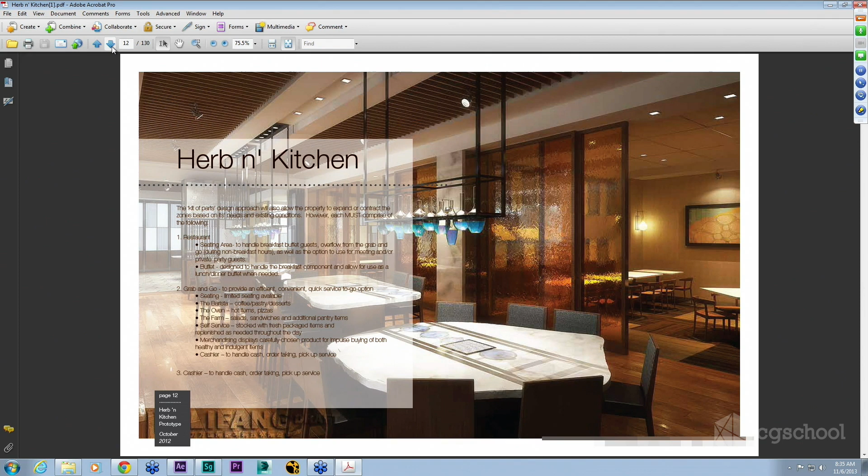And to answer your question, it's all of the above. It depends on how the client comes. The client can come to you not knowing what they need, and then you do the whole thing for them. Or like these two clients, we already have all this stuff we worked on for 2 years, and we work with their marketing department on that. So it really depends on the client and the type of project.

You bring people to a marketing center, and that film is what you show them to really wow them. Maybe you shouldn't just blast it out and let everybody see it, because then they miss part of that story. Everything we do is meant to be experienced, and in some cases presented by people trying to sell something. Our stuff doesn't sell.

As much as we like to think it, our stuff alone doesn't sell anything. It needs to be part of a presentation, a package. So I think we sometimes try to get people to not misuse a lot of these.

So we're like, okay, let's do a little teaser of this film. Maybe we'll do it for free so you can blast that out, or play it somewhere, and then people are going to be like, oh, what's that about? They're going to pick up a phone, or be driven to a marketing center, and get to experience the full thing. But you have them there.

Most of these transactions that we deal with are personal transactions. There needs to be somebody trying to get you to sign a huge, $10 million lease for the next 10 years. So I think it's a great question, and something everybody here should be thinking of.

It's like, my renderings, how are you going to use these renderings? Are they going to go on a brochure? A lot of our clients don't even know. They're like, I don't know. How should we use your renderings?

Yeah, to avoid that, back to your question, and it's perfect that you asked, because that's actually the next topic: establish the end use of every single thing you do. And like Rodrigo said, clients sometimes don't even know how they're going to use things.

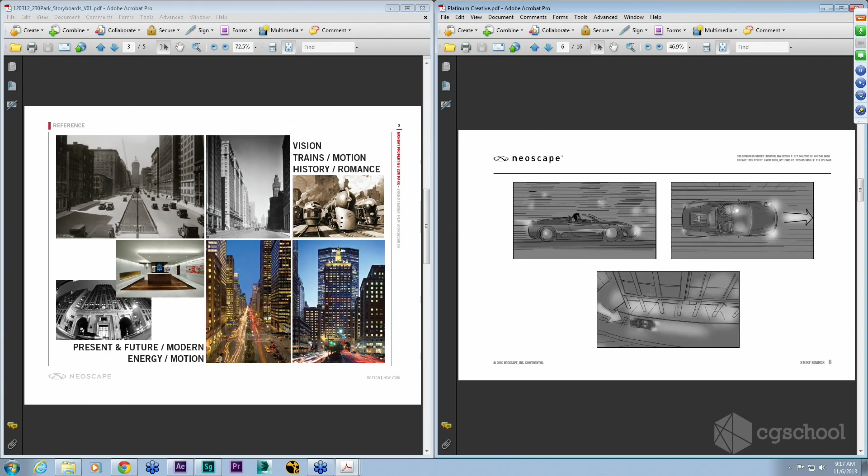This is back in the days when people were spending a lot of money on crazy things to sell real estate, when we had like 6 months to do an animation. This was a film we did, and all you need to know about it is that the client agreed to have a 50-foot tall naked woman painted silver in the film, which I'll get to.

That doesn't happen anymore. So these are slightly more artistic. There's a vibe to these storyboards. This is actually the work of that guy I was mentioning. He's great with characters. This was a character-driven film. He draws action really well, and really gives you a sense. He's a comic book artist, right?

So he really gives you a sense of the sequence, the flow, the camera angle. A lot of what you see here is work that we sat down with him on. We talked about these ideas. We didn't have a lot of preconceived notions about cameras, so he himself figured out a lot of these cameras, and we ended up shooting almost exactly what he crafted for us. That collaboration was pretty exciting.

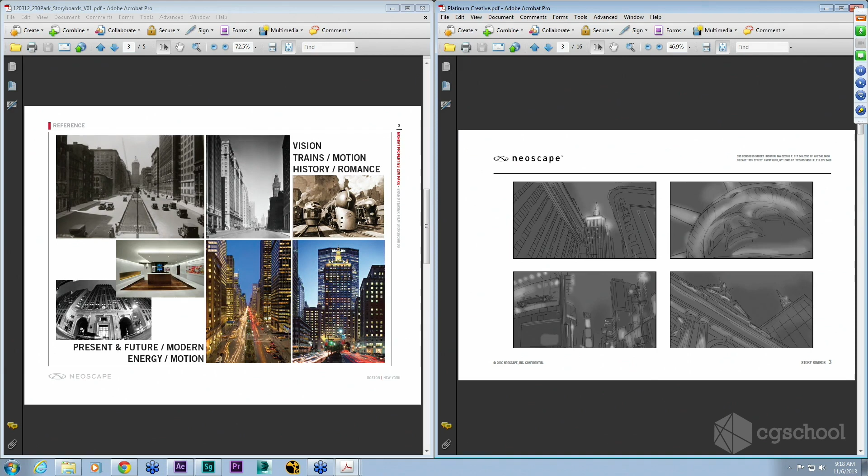So that's again, and we are not going to show this film. The point—you can look at it online.

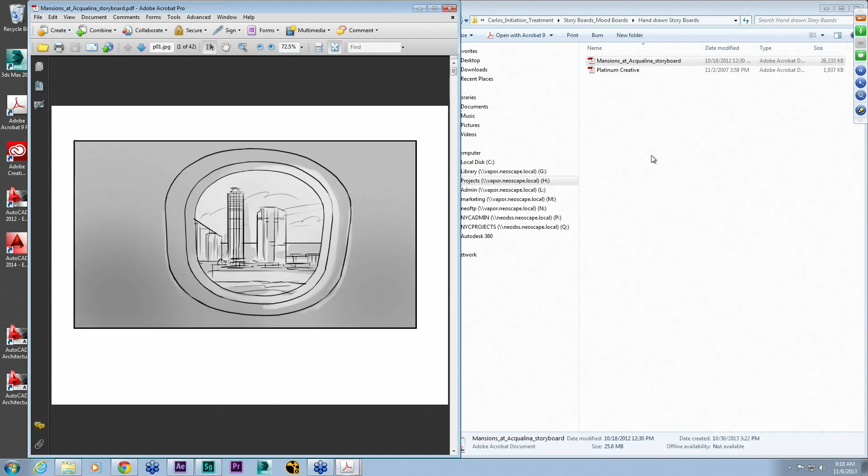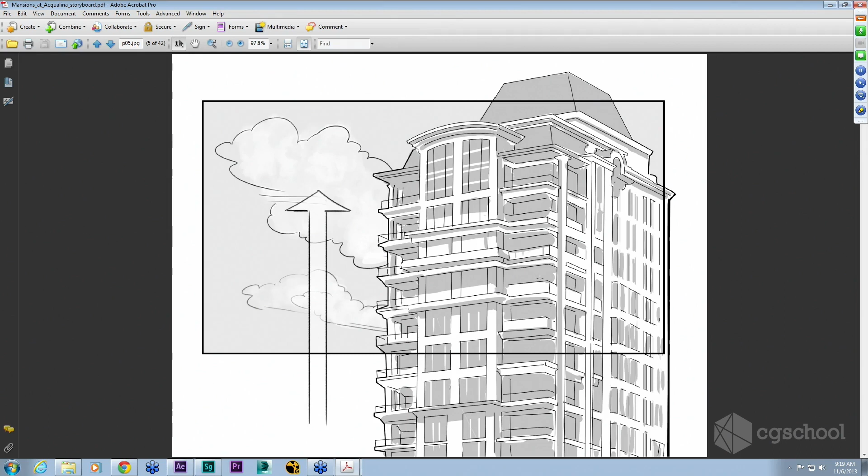The point being, in a document like this one, you need to back up your ideas, your chicken scratch, with a little bit more. In the case of the real storyboards, it's almost not necessary, or not as necessary. You can still have it there, but the story is told in a much clearer way. There's already an intention for each shot, already a little bit of a mood to it that the client can relate to.

So you notice that these two don't have any precedent imagery or mood board page at the beginning, like the City Point one and the other two storyboards.

So a third example I want to show you guys is the CG storyboard. I have two of them, and I'll start with the easy one. It's a museum in Guatemala for the Mayan history. We already had a very good 3D model at this point of the building, and we were already doing renderings for it. The client, these architects, along with their partners - there were a couple of other architecture firms involved - were super cool young guys willing to do whatever we wanted with both the renderings and the film.

Unfortunately, the film has not moved forward, but it's a good example of what you can do once you have your assets already in there. I'm not as good at drawing like Rodrigo is, so this is the way I do them.

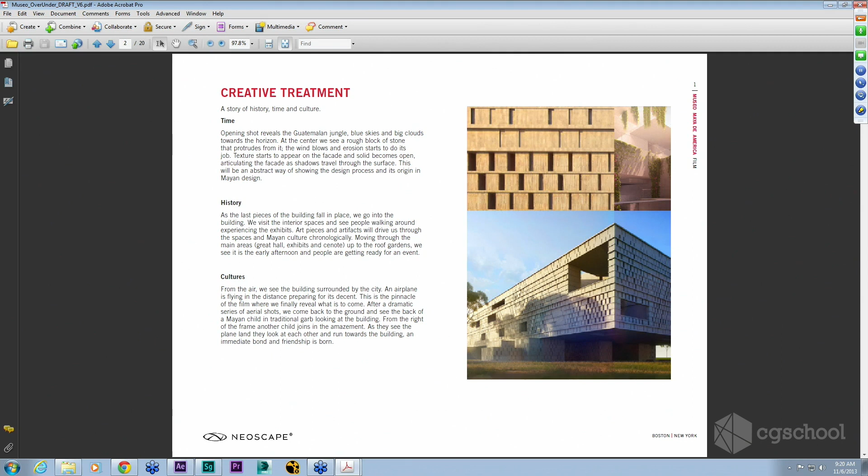Wow, that's a low blow. No, dude, come on, they're good drawings.

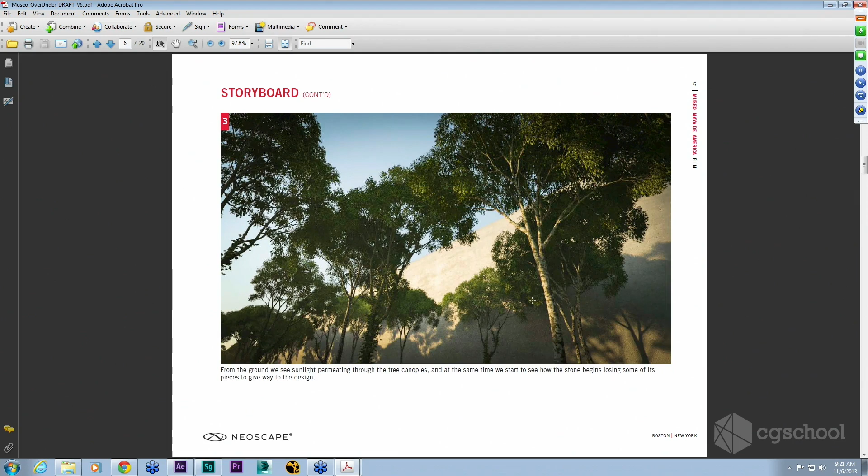So you do your research, your mood board inspiration, and very straightforward - you start grabbing your basic model, V-Ray, sun and sky, some forest pack in there, and then start putting some cameras together to explain the whole thing. A little brief explanation at the bottom, and that's pretty much it.

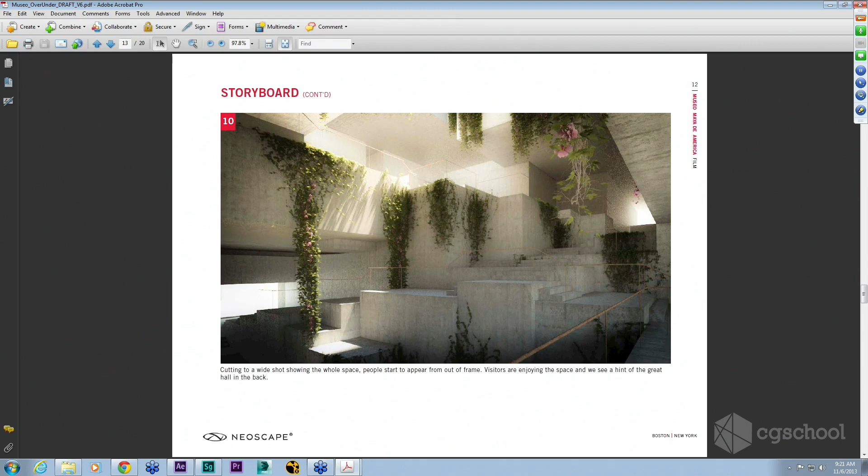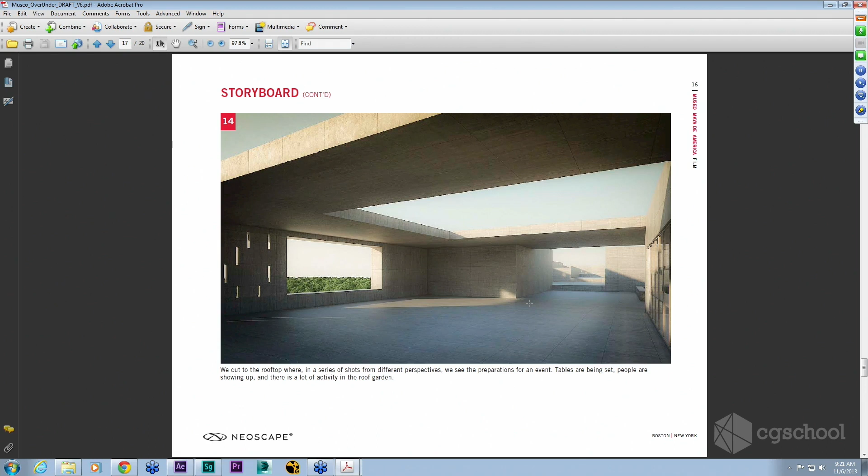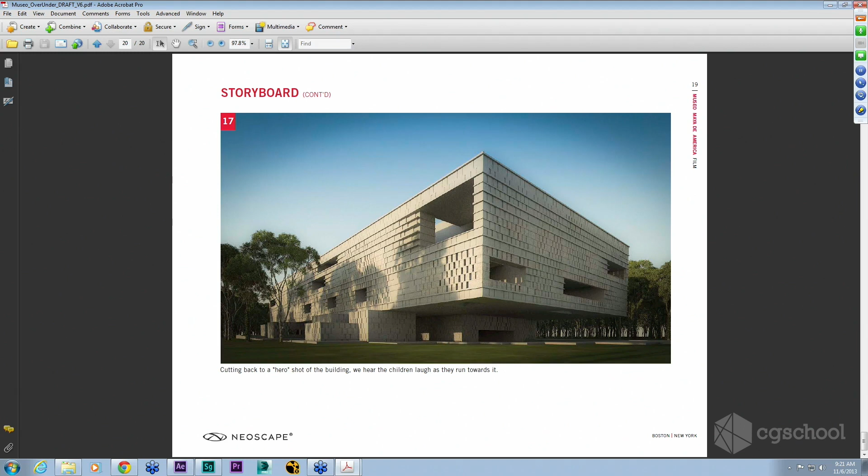I always use the children's chapter book analogy. It's a perfect way to present, particularly if you're going to hand it off to somebody, to walk them through. Some people love the visuals, and ultimately the visuals are the thing you're really selling. But a little bit of explanation - it could be goals, it could be an explanation of the movement or activity you hope to capture. It's trying to leave as little information unanswered for the client, but still not give away that sense of mystery, which in this case was about this beautiful building being carved out of the landscape.

So each time we turn these on, we're going through and just checking for balances, which is why we turn them on one at a time, make sure it looks correct, and then move on. Or else it can be hard to tweak multiple lights at the same time and see what's affecting what.

Then we go through and turn on the garage, and they have some uplighting over here to get some ivy. And then we have the lights up front - we wanted to get some nice catch on the grass there, which I think turned out pretty cool in the final. And then the tree lights.

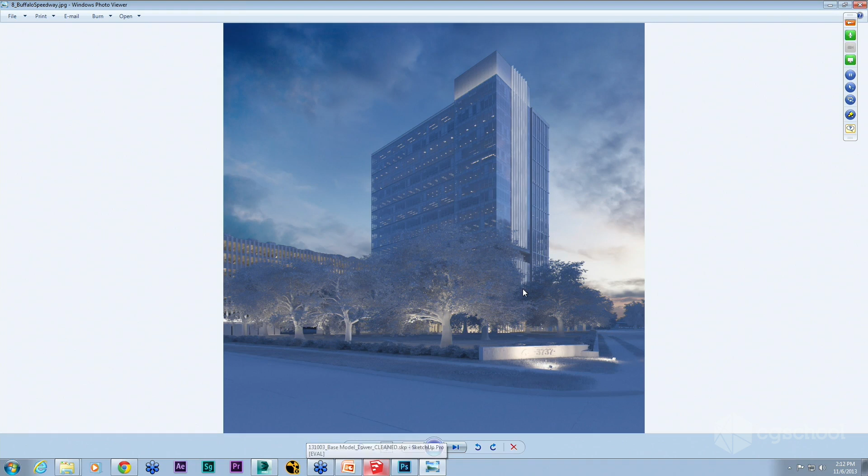And then the next part was the atmosphere. So this is the V-Ray fog pass that we did in a separate file. I wanted to do a fog pass here instead of a Z-depth because I wanted to get all the lights basically, instead of just actual fog. And I wanted to make sure it faded out as it went up. This is actually a really simple setup, pretty much default - I just checked on scatter GI. I could set it up right now, it's so simple. Where are you at? Environment.

V-Ray environment fog - so I just did the fog distance something far, like 500, 600, and then fog height like 40 feet. Scatter bounces, 100. Make sure all lights are on. Super simple setup - just do it in your own file, and then you can save out the V-Ray atmosphere element, which holds the alpha in it. It's really nice.

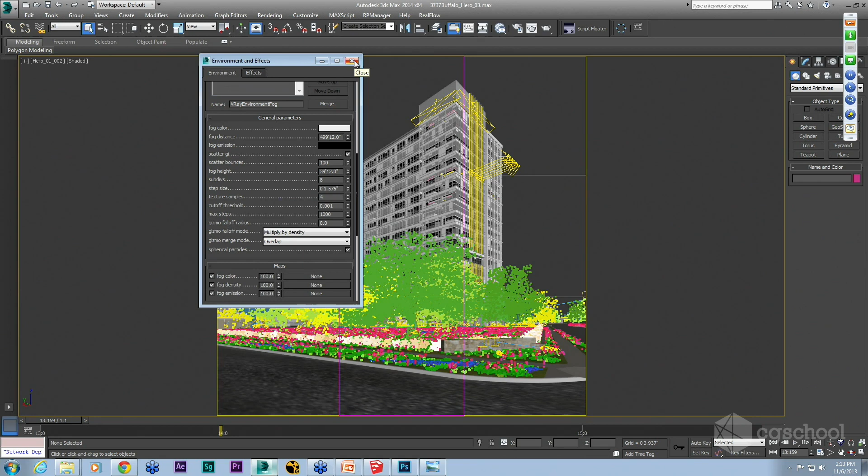Okay, so now that we have this open, I'll show you the light material for the ceilings. So I got a lot of warmth in there, and then I just painted in - so I painted in the warmth on these lights down here.

And then punched it a little bit in areas over here, just to get that nice warmth, our warm hot spots. A little balancing, a little vignette, and we're done. That's it for that PSD.

So basically, you took the image from the modeling until you finished it in Photoshop, right? Yeah. Okay, and is there anybody in your office who takes care of all the images so they are consistent?

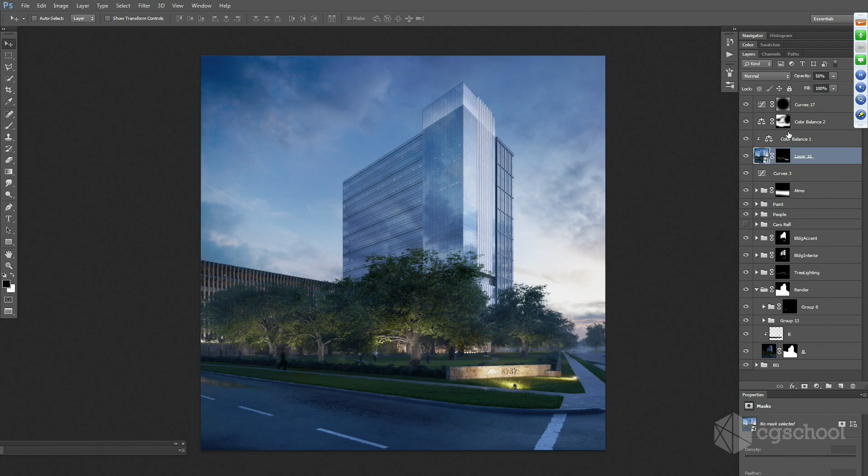So the next step then is to take this particular thing and figure out how we can actually drive more, right? So how we can take that particular map and add maybe 4 or 5 different variations of the texture or the color. So to do this, I'm actually going to pop into Slate.

And show how I set this up with some linked hierarchies under Slate, so I can eventually then add additional maps later on. So one of the things I want to take out of my texture here is I want to instance all my cropping placements. So I'm going to pull out all of these into Bezier floats really quick, so they'll store that information.

And then one thing I always do, I always set my blur as close as I can get to 0. So that's another one that I always pull out. So I'll pull out those 5 for now.

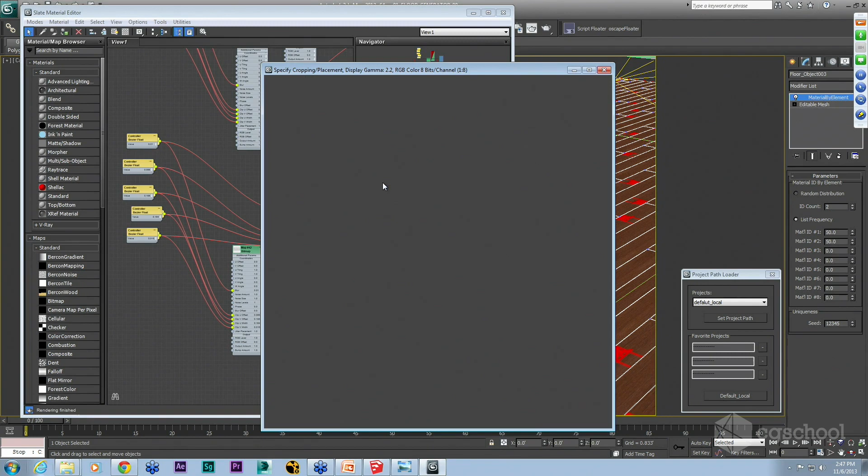So let's show that map. And what I can do then is come into this material, and I can zoom in here on one of my other little 8-bit color graphics. And you'll see that now, once that crop is updated, and again, because we copied that, the secondary crop of

the bump is also brought to the bump map because we've linked those parameters. And now we have different variation.

And so now if we wanted to adjust frequency, I did a light and a dark. So we could say that we want significantly less dark materials. We can tone that down.

And then, correspondingly, you need to manage adding the other one up. I guess I've never checked if this automatically defaults to 100 at some point. I always make sure I do the math so there's no leftover pieces.

And then quickly, just with what we've shown again, dragging our whole layer stack, pulling down, and I grabbed a little too much there. Let's deselect him.

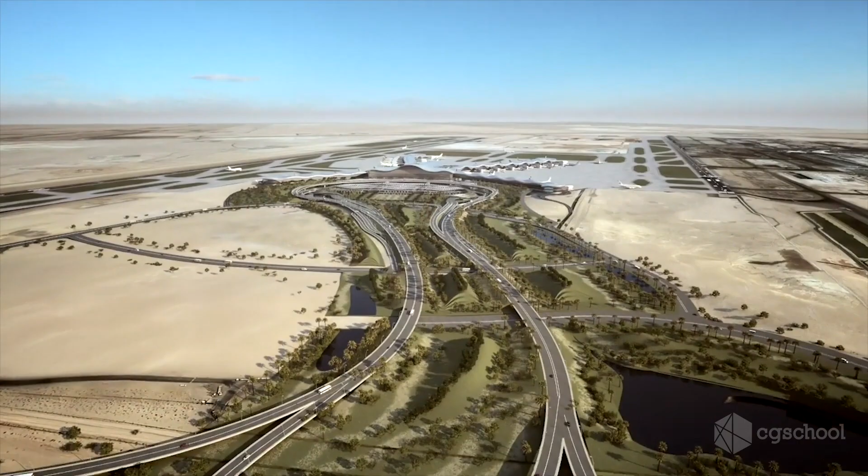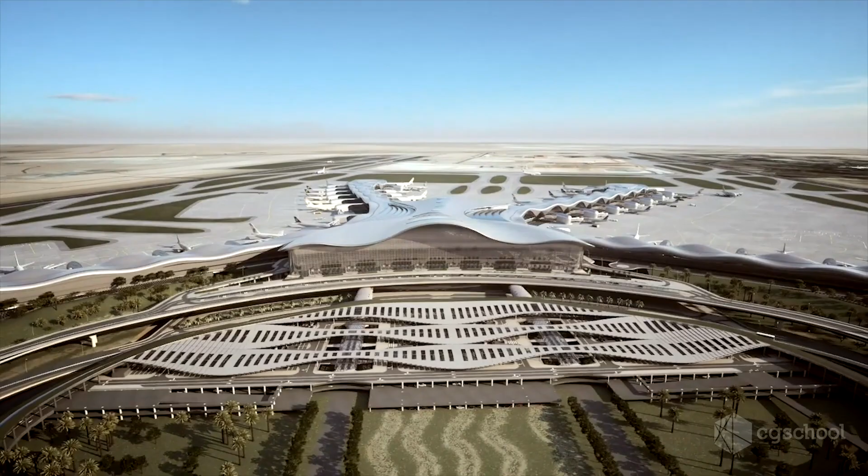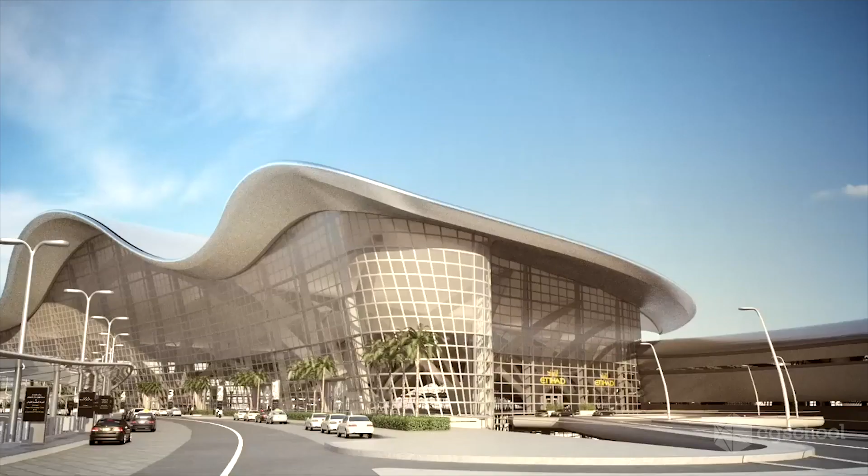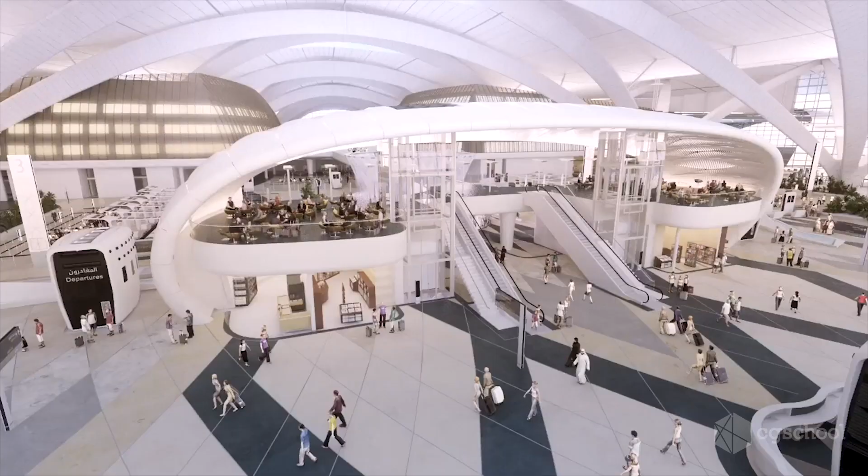Designed to accommodate 40 million passengers annually, this environmentally conscious project will parallel the dramatic projected growth of Abu Dhabi's population in the years to come. An inspiring landscape guides you towards the airport's main entrance. An iconic structure over 50 meters in height is a captivating sight and a prelude to an exciting journey. With one of the largest spanning arches in the world, the vast uninterrupted entrance space with its exquisite detailing is a welcoming symbol for hospitality and generosity.

Here for a second - so a lot of the voiceover, which we actually helped write, is literally telling you what's happening, verbatim captioning what you're seeing on screen. Some of it is augmenting what you're hearing, like them telling you it's 50 meters.

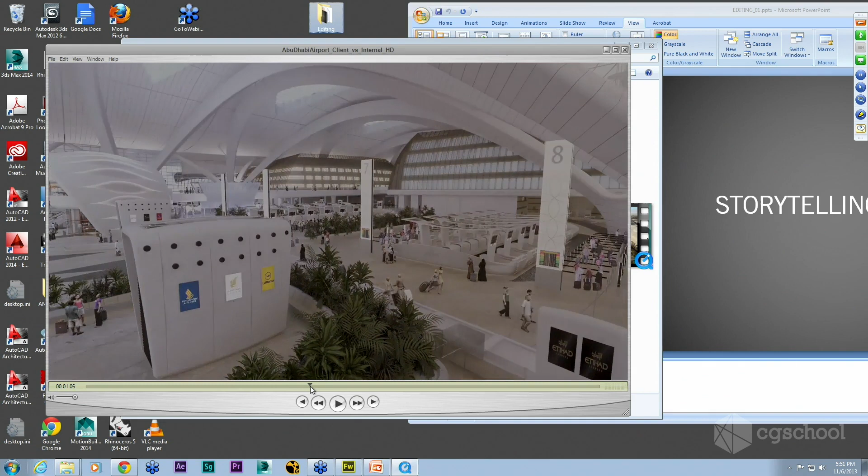We pitched this movie initially - it's a huge airport in Abu Dhabi. Their current airport is and was crappy, and doesn't work for them, so they wanted to sell the drama. We thought about what happens at airports - most people hate going to the airport, so let's focus on this peaceful, relaxing, seamless experience. We pitched a creative that took someone arriving and someone departing, creating a juxtaposition of both sequences happening at the same time.

At some point in the film, maybe they cross paths. But they said yeah, but no - let's do a walkthrough, and somebody's going to narrate what people are seeing. That's fine - when the sheikh says something and wants something, that's what you have to do.

So this is our own internal rendition, using the same shots - we didn't produce anything different - but capturing those two moments in a way that's much more interesting and personal. The architecture is still there, still beautiful, but with a different music track and a different arrangement of shots, you start to see how the story becomes more personal.

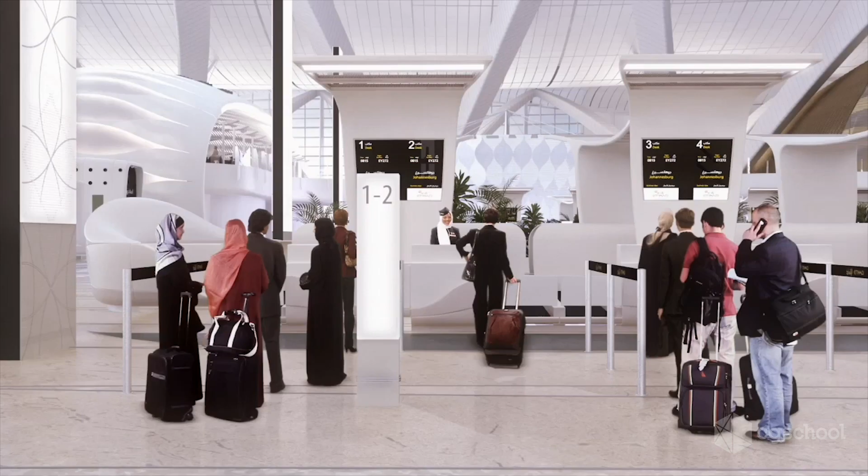So just a different way to approach the same assets and create something with a very different feel. One feels more like a promotional, commercial thing, and the other feels more like something you'd show an actual visitor to say, hey, this airport is going to do everything for you, it's going to feel seamless. It's not really - we all know what airports are like - but it's about trying to capture that effortless, relaxed feel.

So for this project, we've shown you planning of shoots, B-roll, storyboarding and concepts. This is pretty much the final film, with and without the color correction. I'll keep it small because it doesn't play that well. So there we go.